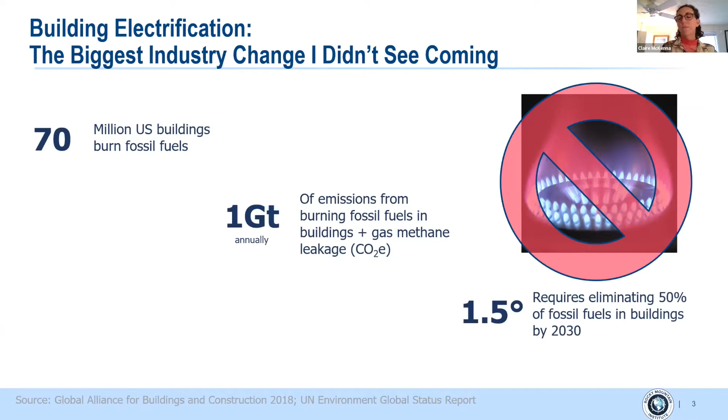And this gets us to the 1.5 degrees C target by 2050. So just wanted to make sure that outline is there for you, but at the same time, as we talk about the technology over the next half hour or so, realize that it's an incredibly disruptive market transformation that's currently in the very early seeding stages, and from a deeply transitional perspective, this is what we're looking at.

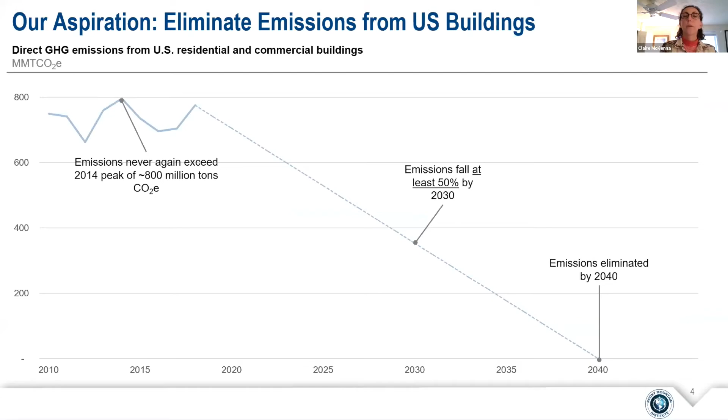So, regional considerations. When we talk about building electrification, we are talking most specifically about heating climates, and then the different components of whether electrification is truly an environmentally sound or reasonable approach. That has a lot to do with the severity of the heating climate, how much heating is actually required, and also what the grid or fuel mix is and what regional energy sources are available.

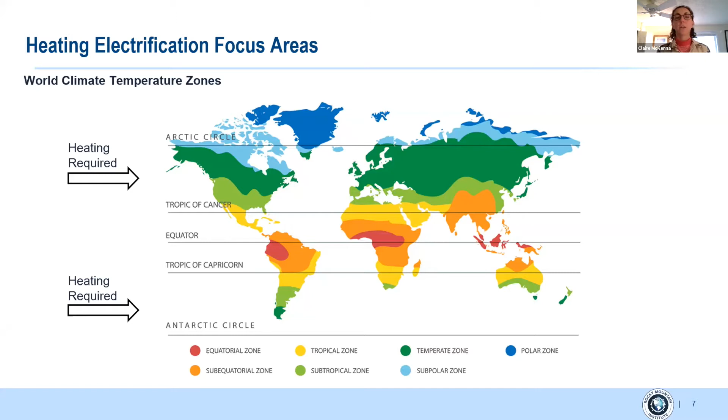Cooling climates really are not as much the focus of this. So folks tuning in from South America, if you don't have heating needs, heating or spacing needs on an annual basis, then this is not really the concentration here. So when we're talking about electrification, cooking and heating are really the areas of focus that we talk about when we discuss fuel switching or technology transformation.

So this is some results from a recent study I did with my group here at the Building Electrification team at Rocky Mountain Institute. Essentially what we're trying to show here is that there are two components to whether electrification is a sound environmental strategy, meaning when we look at it on an annual basis, will converting to electric heating actually reduce carbon over the status quo of maintaining a fossil fuel combustion system for heating. And there are two components, as I mentioned.

Annual heating coefficient of performance, or COP, is what we look at from an engineering perspective on how efficient the heating is when we move to this heat pump technology.

So just to clarify, we're talking about heat pumps as opposed to electric resistance heating. This is really what RMI and folks working on electrification are advocating for when we talk about fuel switching to electrification. We're going to use the benefit of heat pump technology, which gets well above 2, a lot of times 3 times more efficient in heating than a natural gas boiler, which can be anywhere from 80% to 90% efficient. So we're getting that really important efficiency delta.

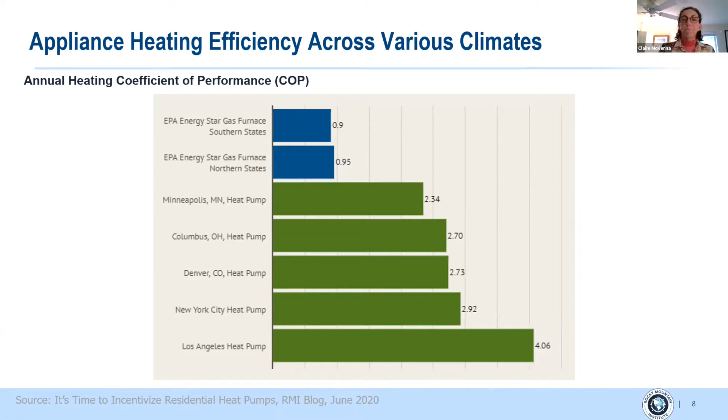And that's represented here for some of the more severe climates in the US. A lot of these are northern, either more mountainous or more snowy and wintry cities. We also compare to Los Angeles, since for any heating that needs to happen there, in a climate maybe more similar to the southern part of South America, we're looking at a COP of 4.

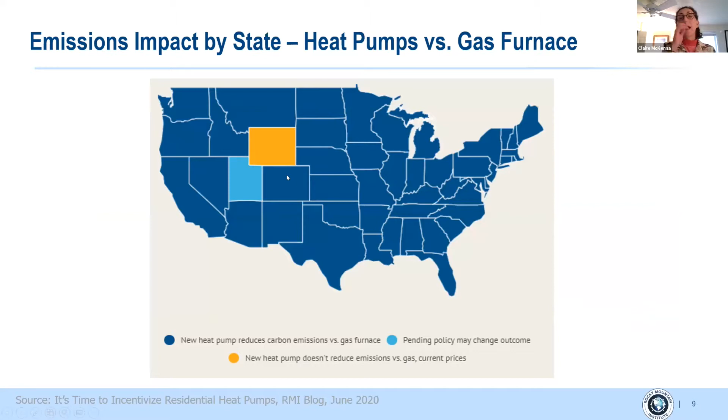And I would imagine this is more similar to Colorado, which is actually where I'm currently located, where we do have a lot of coal in the grid mix, and that's actually what's holding back... this is Colorado, that's Wyoming, sorry. Utah and Wyoming have a lot of coal, and that's actually what's holding back these states from breaking even.

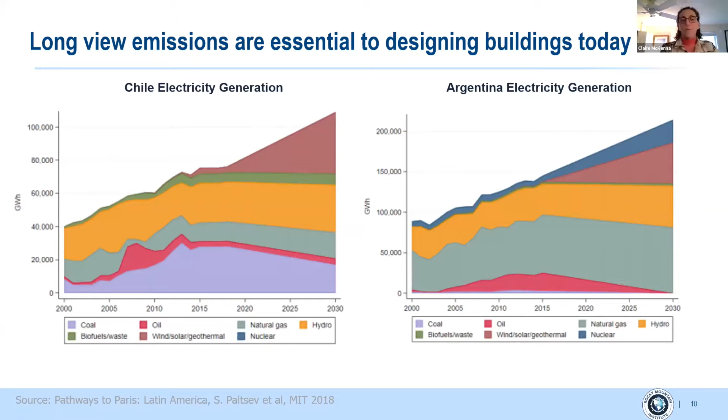Argentina has a lot of natural gas, but we're seeing oil come down and an increase in nuclear and other emissions-free resources. So that's some of the important things to look at. And one more note: it's really important to look at the future, where the grid is going, rather than a backward-looking or even current-looking assessment of what the grid scenario is today.

So moving on, district thermal heating is another way we think about electrification. This is the concept that there would be a thermal heating distribution network. And I like this idea in comparison to individual building electrification with heat pumps, because I think this represents a more viable transitional way, especially in areas where we see a lot of natural gas infrastructure.

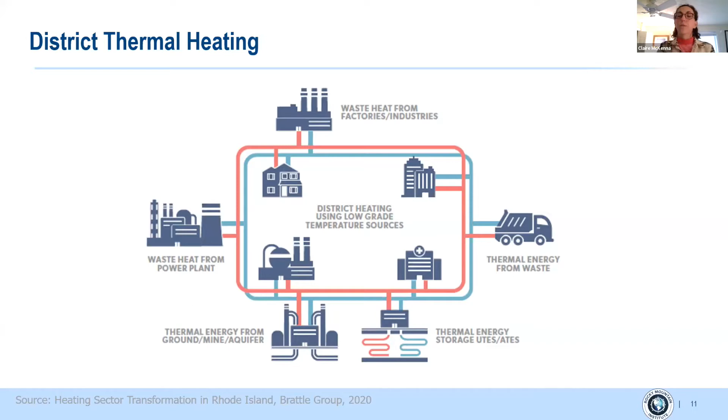So most of us know that in Iceland, these are kind of the poster children for geothermal. They have lots and lots of geothermal. That's why they're so famous for their hot springs and hot soaking pools.

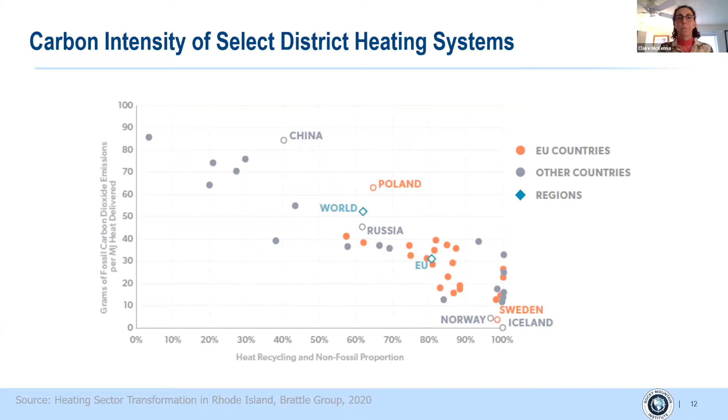Okay, moving on to universal considerations. I tried to break down the notion that not every place is created equal in terms of its environmental opportunity. But when it comes down to air quality, this is something that all of our regions should be very concerned about. Recent research from the California Air Resources Board and some researchers in California found that...

direct combustion of fossil fuels in buildings, mostly related to space heating and water heating, has almost as much outdoor air pollution contribution—particulates, specifically NOx, nitrogen oxides—as all light-duty vehicles in the state. When I saw this comparison, it just completely floored me.

Kind of in the background here is the prototypical smog problem in LA. When you think about how direct combustion in buildings is flying under the radar of public knowledge on the poor air quality contributions this fossil fuel combustion has, it starts to really awaken us to understand how pressing this is, and how quickly it'll change once this information becomes more available and the research comes into the public eye.

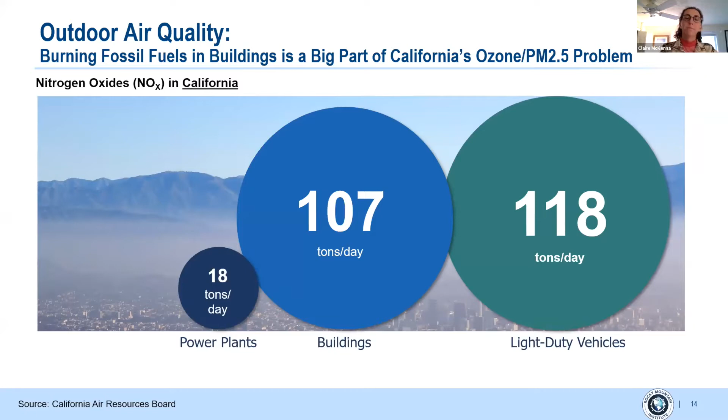Equally as surprising, the indoor NO2 or NOx emissions from cooking on a gas range can actually exceed the outdoor air quality requirements that the EPA has for outdoor air. Currently in the United States, indoor air quality is not regulated, but we're finding through similar research, and actually some novel research that my team has done and presented in May...

This is something you can find on our website, and I'll be able to provide the slides so you should be able to access this too. I highly recommend you dive a little deeper into this and educate yourselves on how under the radar, but yet how alarming, the indoor air quality from gas stove emissions actually is.

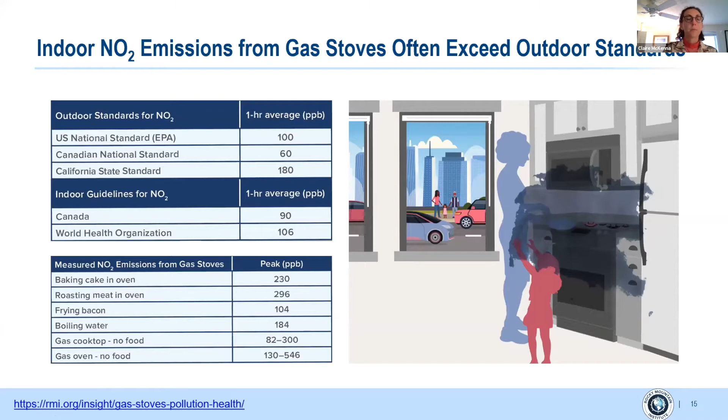Moving on, this is another topic that wherever we are in the world, we need to know a little bit more about: the idea that induction cooking technology is going to be replacing gas burners. This is kind of our solution to the indoor air quality problem.

Here we have a comparison for those of us who love graphs and think about energy—excess energy is being wasted. We certainly need to continue an efficiency mindset as we think about the transformation to electric buildings. What's happening here is we have a couple of different induction cooking ranges, shown by the red lines.

When induction turns on, it heats through an electric coil that directly heats the pan, so there isn't the electric resistance that kind of works the same way as a space heater does. An electric resistance heater or coil is going to provide way more energy than is actually needed to directly heat the water—everything above the boiling line. That's what induction technology enables, and why we think that's really important; this transition is going to ride on the back of this understood technology.

So, these are photos of my team—we got together in February before the pandemic and cooked together just to test out the technology. So I can say it works. I can't vouch for the fact that it's completely affordable right now, but that's something we'll have to watch for, and something I certainly advocate for folks to educate themselves on.

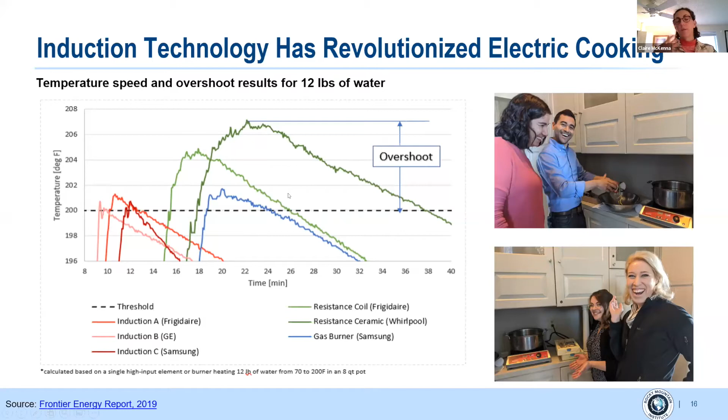Lastly, on the universal considerations—refrigerants, you know, are a known issue.

When I talked about the environmental trade-offs of heating efficiency and grid emissions, that didn't actually account for refrigerants. Although I've seen some studies coming out of California that said the conversion actually pays back within a year, so we need to continue developing and implementing this heat pump technology, even though refrigerants aren't exactly where we need them to be.

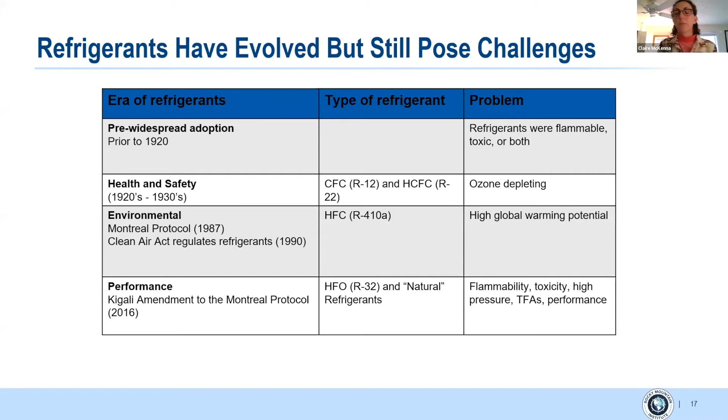As of 2016, the Kigali Amendment to the Montreal Protocol established a global consensus that there's a need to transition to lower global warming potential refrigerants. The problem is that those are largely flammable, and in the US, and I think most of the world, building codes, especially the fire code, really limit how much of these refrigerants can be in a building. That makes sense from a public safety perspective, but one of the biggest transitions needed to enable electrification with heat pumps is to get a better grip on what refrigerants can be used and how we can work with existing laws to deploy them safely.

So in summary, how do we think about refrigerants? This is one of the biggest issues of everything I've presented. Induction cooking doesn't come close to the impact refrigerants have for this transition. Unfortunately, there isn't something comprehensive enough to say 'this is definitely the one to choose, let's all move in this direction.' The US is in a different place than the EU relative to what's allowed, and again it all comes down to public safety laws.

What I'm advocating for here are really the latter two main areas of focus: encouraging use of low global warming potential refrigerants through policy and R&D to develop new refrigerants that make more sense, and also looking at how HVAC systems cause leaks, since leaks are inherent in those systems, and how we can design systems moving forward, even standard refrigerant-based VRF systems, to leak less.

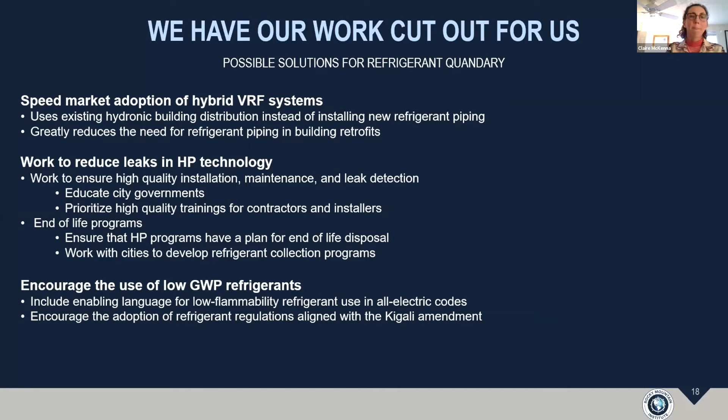Moving on to quite a chunk on existing building electrification. When we talk about 70 million buildings in the continental US that need to transition to electric, that's the biggest chunk of the pie where us as industry professionals really need to focus our energy. From a fortune-telling perspective, this is a market that's coming up.

It's not as big as the construction industry today, and we're not really focused on retrofits, but as we move towards politically mandating electrification and greenhouse gas emission savings, we will need to look at retrofits more seriously. So I think there is a new market coming in this regard.

I'm going to take you through some of the foretelling trends and projects coming up in Europe that I think are really good models. Basically what we need to do is transition from the status quo, a project-specific, craftsmanship-oriented retrofit model that we currently have in much of the world, to industrial production of retrofit panels and retrofit solutions.

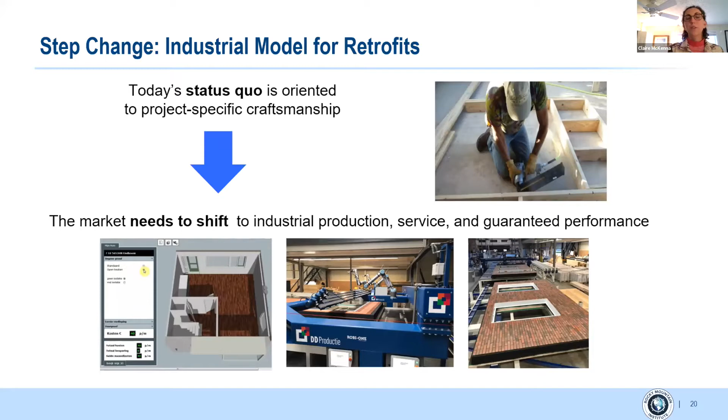Energiesprong is a really cool, partly movement, partly organization that has figured out a comprehensive way to retrofit multifamily housing to be both all electric and have better envelope performance, so better efficiency, and it also includes solar.

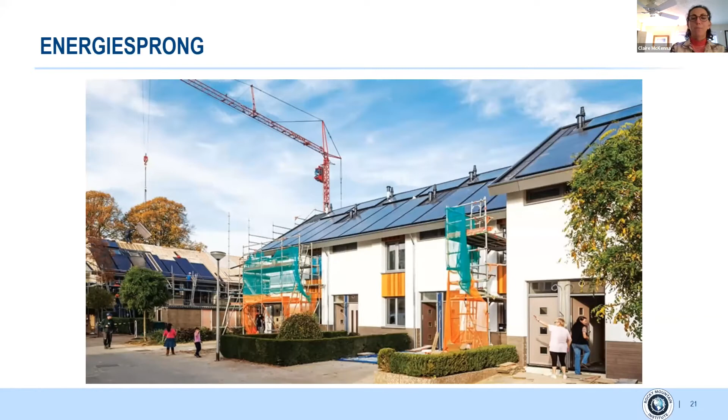I put this little snapshot from their video online. I think they've just updated their online resources, and I highly recommend you go to energiesprong.org because it's a really cool explanation of what they're proposing, and I think it does a good job at being a cultural force. This really interests me, how the cultural force ties into these technical changes, because so much of it is, when we talk about multifamily development, what people need to buy into.

It becomes like a market issue.

So what are the technical components of Energiesprong? And also, as you'll see, what we're starting to do through RMI in the US.

So, unitized facade panels. These are industrially prefabricated facade panels that actually go directly out onto the outside of the existing multifamily walls, which is super cool. Mechanical system pods that are inherently all electric, designed to be completely fossil fuel combustion free and also modular. And then energy plan financing, which is the enabling component of this.

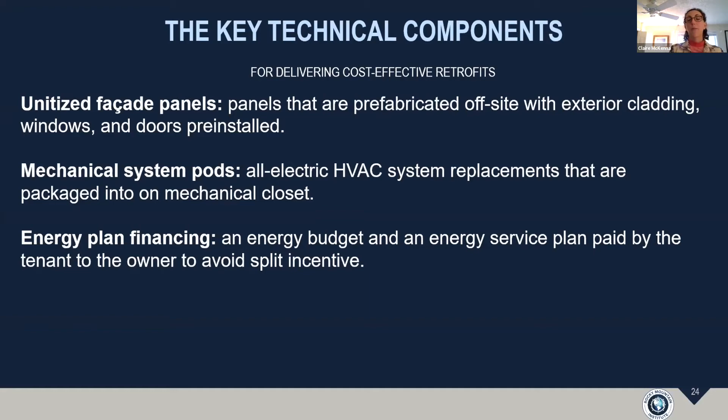The technology is hugely important, but again, to make this the societal change that we need to see, and the level of affordability that is extremely important from an equity perspective, we need to think about the financing. I'm not going to touch on that as much today.

But for those of you who love buildings and are here to hear about the technology approaches, there are three kind of major prefabricated manufacturers in the Netherlands. I forgot to mention, Energiesprong is a Dutch initiative, and I think it's starting to include more EU countries, but it really does originate from the Netherlands.

These are some of the companies. My teammates from RMI actually visited the RC panel factory floor, and so these are images from their visit there.

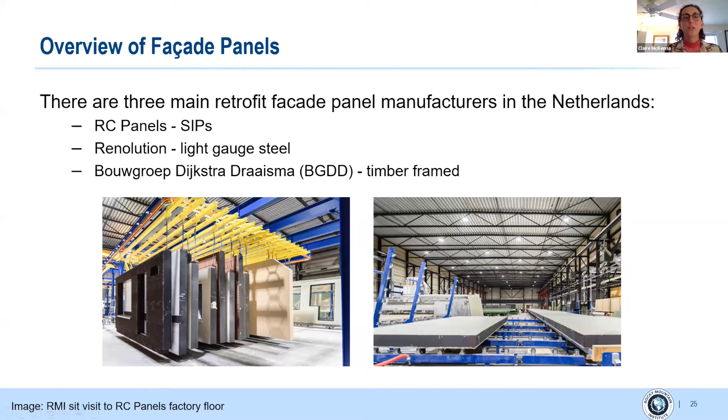So that was cool. Then when we talk about facade installation, I think I'm going to outline what the actual envelope performance criteria are in a minute when we talk more about the US case studies.

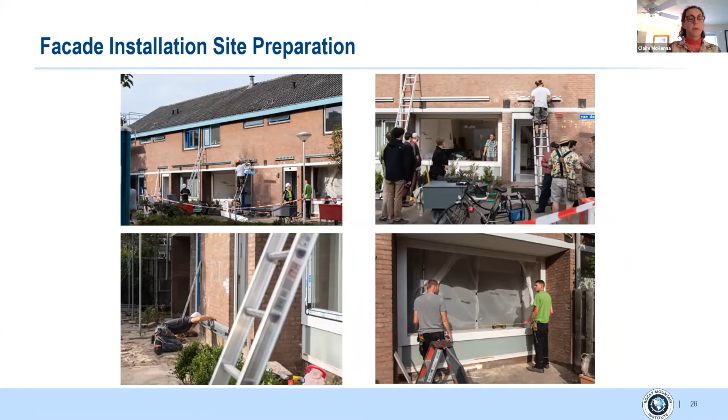But the facade installation has a little bit of site pre-work here, and you're kind of seeing that, like laying out the frames and laying out the junction points. That's actually kept to a minimum, and that's the whole concept of having this industrialized prefabricated solution.

So then moving to the mechanical pods, the modular mechanical pods, there's another partner on board called Factory Zero, also based in the Netherlands. That's a mechanical HVAC, basically fabricator.

They came up with this concept of putting all of the domestic hot water, the HVAC, the PV inverter, and the energy recovery ventilator, everything required to make this house run, all in one place.

And you can see it's kind of cool. It's almost like what you would put onto a spaceship in a way, like it has to be packaged so that it can just be dropped on.

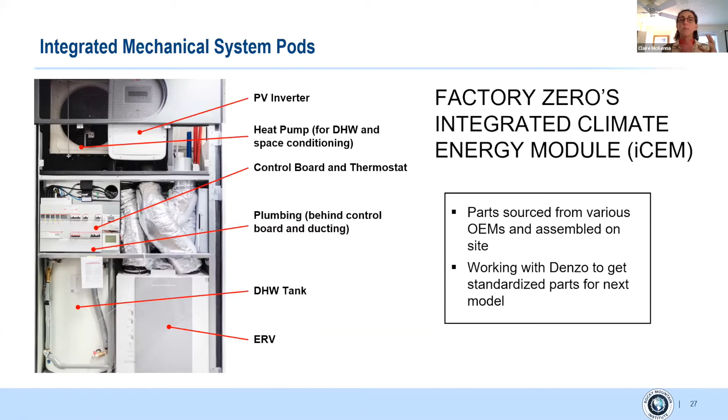I think that this is the really cool innovation here, definitely not in the technology. We know the PV inverter is off the shelf, the ERV is off the shelf, but when it comes together and is packaged here and sold as a product, I think that's the real interesting innovation.

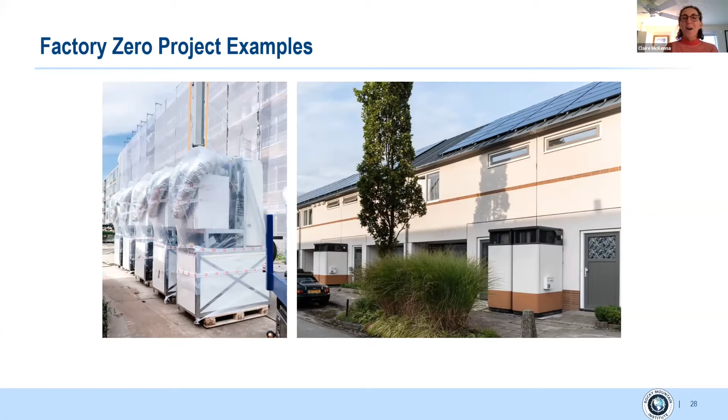So here are some examples of what that module looks like in real life, and here's kind of how it gets positioned outside of the project. I think it's pretty standard. It's not going to floor you with its attractive beauty, but in the end, this is kind of the first run at it.

And then here's the finished project, and it's super cool that it also has solar on top. Again, this is the case study from the Netherlands. I found this really fascinating: basically, the supply and demand sides of the market here work together to negotiate a price reduction curve.

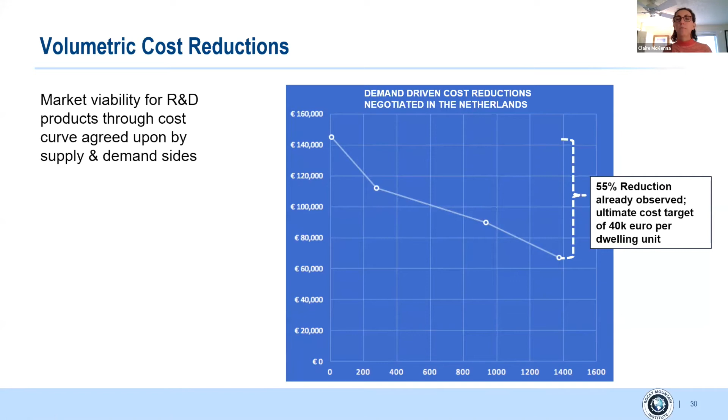This is sort of the model that U.S. projects are looking at when they think about affordability and targeting that kind of financing, because if the market—both the demand side, the customers, and the supply side, the manufacturers—can know where the market is headed, it gives everybody a lot more confidence in how to step into this transformative new product.

So Realize is the name of the project that takes the Energiesprong inspiration and guiding principles and applies it in the U.S. Here we're using passive house U.S. targets for efficiency, so that's going to drive the envelope performance.

Really targeting zero operational emissions, with an aspirational goal of having reduced embodied carbon—hopefully you're tuning into sessions about that, we're not going to cover it here today—and then essentially simplifying the retrofit process.

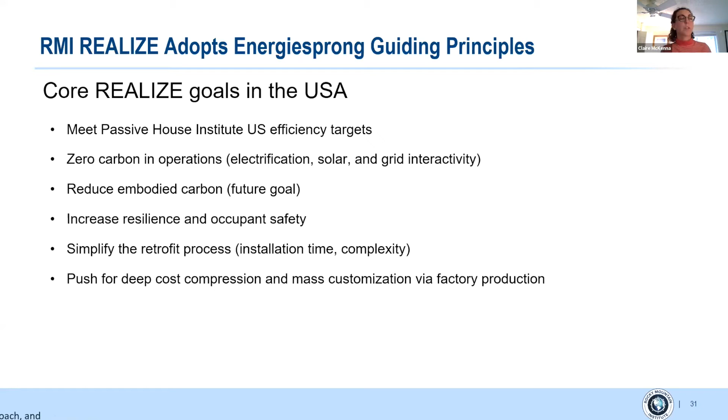So really leveraging the inspiration from Energiesprong and thinking about how manufactured wall panels and modular HVAC can make a huge difference in the scale of retrofits for multifamily in the U.S. There are two examples we're going to touch on: Beverly Terrace.

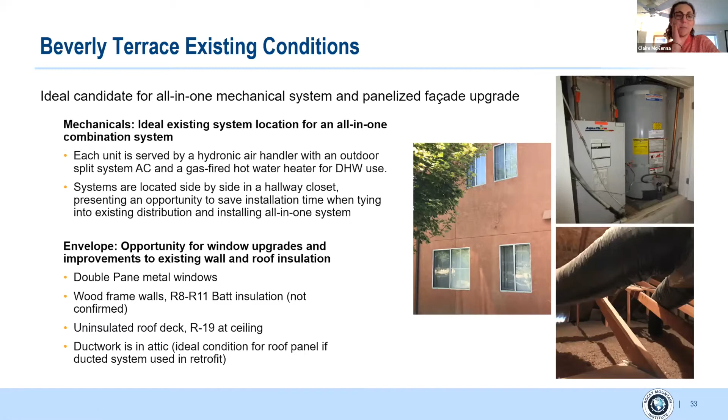Beverly Terrace is located in California, so not really an extreme heating climate, but in the end I think a really important case study. I'm not going to go into this too much because I do want to make it to questions at the end.

But basically I wanted to point out that the typologies here—one of the biggest challenges for any group, organization, contractor, or manufacturer trying to actually deploy this at scale—is that even though the industrialization of the products really helps,

Those farther south, like San Diego and Los Angeles, are going to be super hot, but also on the ocean. And then San Francisco is notoriously pretty chilly, although it doesn't have a severe heating climate. Even within that context, there's quite a range of heating typologies.

So this is something the industry is going to have to tackle—just getting more aware of what those differences are. My recommendation is that we think about this from a holistic perspective.

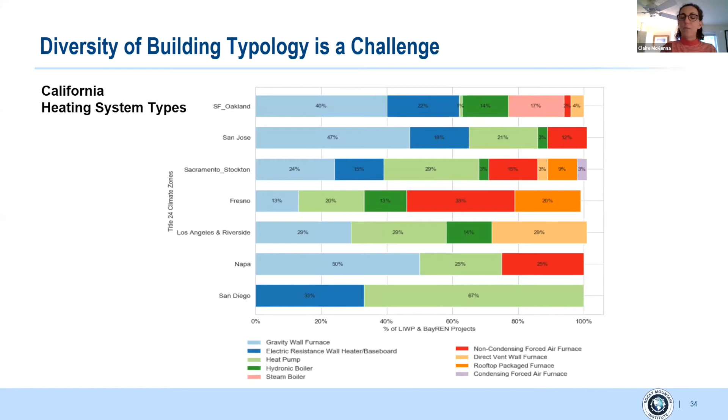Depending on who you are as a solution provider—whether you're a government, or researching this, or providing it on a technology basis—I think cracking what the typologies are in my area and how to address those, either by addressing the biggest section of the market or specializing in being flexible, is what I would recommend in terms of how we position ourselves to really make this change happen effectively.

Okay, so for about 5 minutes here, I'm going to cover new building electrification. This is actually more my area of concentration.

So I want to set the context a little bit for what new building electrification is looking like right now in the US. There are 3 cities in the US, interestingly geographically far apart: Berkeley, California, on the West Coast; Brookline, which is actually a suburb of Boston on the East Coast; and Takoma Park, which is a suburb of Washington, DC, our capital.

These have all taken the initiative to ban the use of fossil fuels in their cities, and this is pretty unprecedented. Berkeley, California was the first—this happened last July, so just over a year ago now.

It's pretty unprecedented from the perspective of typically the states in the US having jurisdiction over building codes that say what is and is not built in buildings. But these cities said, to hell with that. We don't want to see any more fossil fuel combustion, in particular natural gas, in our buildings for new construction.

So it's been a really exciting trend, a first mover kind of initiative that RMI is taking up. My team, and my job specifically, is to work with Brookline in Massachusetts. We're currently running a program called the Building Electrification Accelerator that extends the know-how and peer learning platform for banning natural gas and fossil fuel combustion in new buildings to 13 other cities in the state. We're trying to amplify this movement and make sure that state representatives and even the federal government are aware of how important it is to stop digging the hole of continually investing in fossil fuel infrastructure.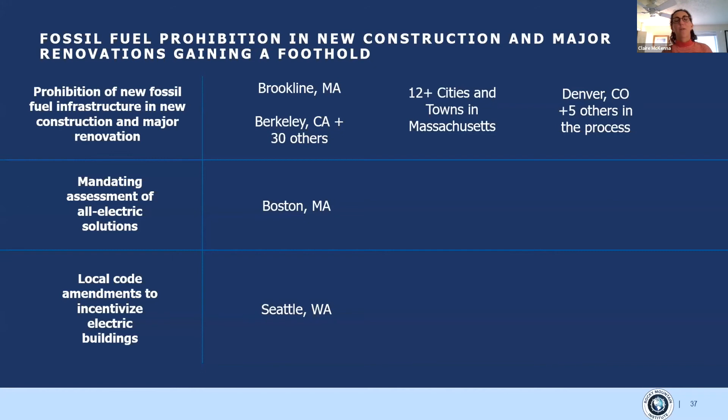And then lastly, Seattle, just because of the laws, is taking a different tack. They're looking at local code amendments to incentivize electric buildings, saying that if you make an electric building as opposed to a gas building, we'll give you more FAR. You can build, and there'll be easier negotiation on transit-oriented development. It's tough to think about trade-offs and sustainability, or what the goals are for a zero carbon future, but this is just the tack that Seattle is taking.

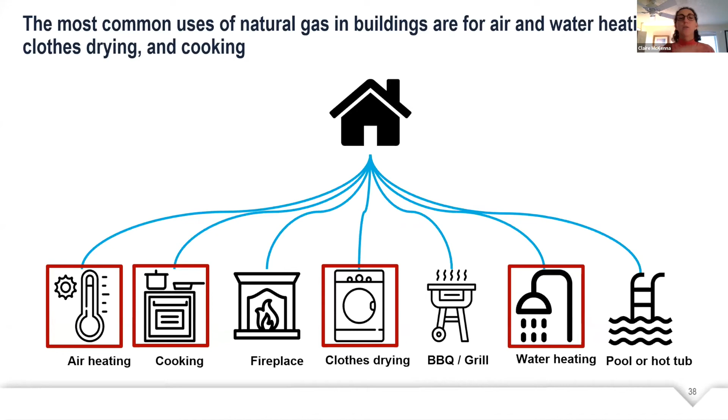Coming to the end here, I wanted to highlight that specifically for residential uses, heating, cooking, water heating, and sometimes clothes drying are the main areas where we use fossil fuels today. Maybe this would have served us better at the top, but I just wanted to talk about when we think about converting technologies in new construction, these are the main areas we are focused on.

Again, some original research from Rocky Mountain Institute that looks at new construction single-family housing. This report was published in 2018, and I'm actually currently leading the revamp of this project, where we're going to be looking at 7 new cities, both single family and multifamily. So look for that coming out later this year.

But basically this shows that for these 4 cities that were chosen as areas of study 2 years ago, the all-electric heat pump approach actually has a better net present cost than the fossil fuel scenarios. You can see that in the different cities, different fossil fuel scenarios were investigated. So in Providence, Rhode Island, New England, very cold, propane and heating oil are some of the dominant sources of heating there. But we're really looking at natural gas and the project level or consumer cost trade-offs for adopting heat pumps today.

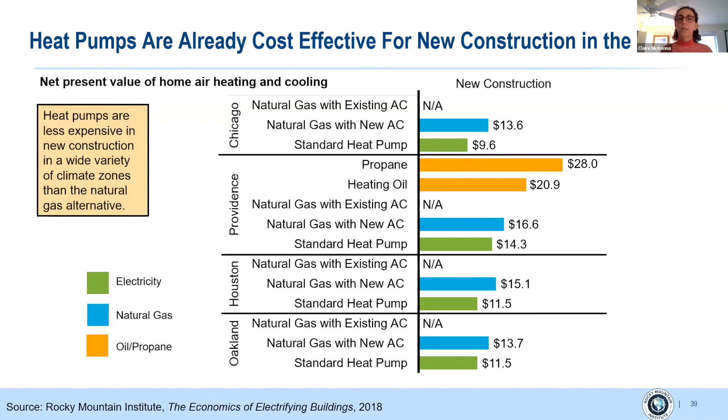And lastly, I wanted to talk about barriers to commercial adoption of electric buildings. Single family residential is one thing, I think it's quite simple there. That's really a matter of, I think, this being a disruptive change to the real estate industry. I just looked last night, and as of 2019, the residential single family construction market in the U.S. is a $1 trillion industry, and I really don't have confidence that those builders, those companies, will want to or have the capability to transition to all-electric technology. So if anybody wants to get into a disruptive market space, I highly recommend looking at all-electric solutions for residential buildings.

But then when we talk about larger buildings, in the context of urban environments, what are the challenges to adopting electric buildings in new construction today?

Basically, three main buckets. Regulatorily, there's decommissioning of the natural gas system for a lot of the world, especially in the continental U.S. We really rely on natural gas for heating—it's so easy, it's already piped. But if we want to get to a carbon-free future, we can't have any more natural gas. So thinking about how those workers are affected, the fact that it'll take a long time to transition, and who gets left behind, are really important considerations. And then who ultimately pays for changing the technologies.